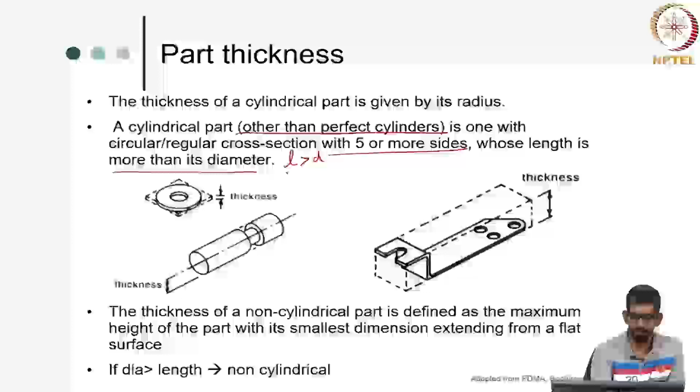Whose length is more than its diameter - that is how you define a cylindrical part. So, if it has 5 or more sides and its length is more than its diameter, then I would still call it cylindrical. It is not a perfect cylinder, but I would still call it cylindrical provided it satisfies these two conditions.

How they talk about the cylinder is, we will discuss what I have here, but just look at this. Let us say you are going to gift this to someone - what will you do? You will put a box around it. That is all this one says.

You take a part and imagine you are gift wrapping it, but a very snug gift wrap - taking a box that just encloses it right around. Then you go and measure the thickness of that box. That is what is the thickness of your part.

If you take this particular part, you do not know whether to take this as a thickness, or whether you will take this as a thickness. These are thickness of the sheet metal, but you are talking about thickness of the part itself.

Then what I need to do is put this box - you see this dotted line, imagine that is a box, a gift wrap that goes around it. Then the thickness, of course you know what it is - smallest dimension compared to the length - that is called the thickness.

Similarly, you can take this washer for instance. Imagine you are gift wrapping this guy, a small box, like Flipkart or Amazon packaging, whatever the box is, and you measure the thickness of that guy.

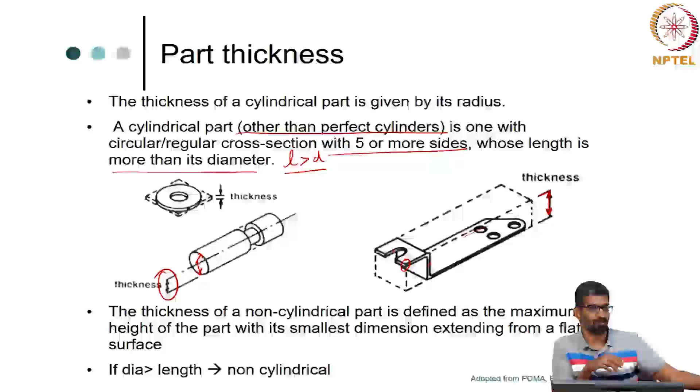See, the only point is whether it is this cylinder or it is a cylinder that goes into your drainage tubes. They are also hollow stuff only, but they are also cylinders. But if you measure the thickness, you necessarily know that one is much larger in thickness than the other. This can be handled by 2 fingers, whereas you need at least 2 people to handle that. It is as simple as that, that is all, okay.

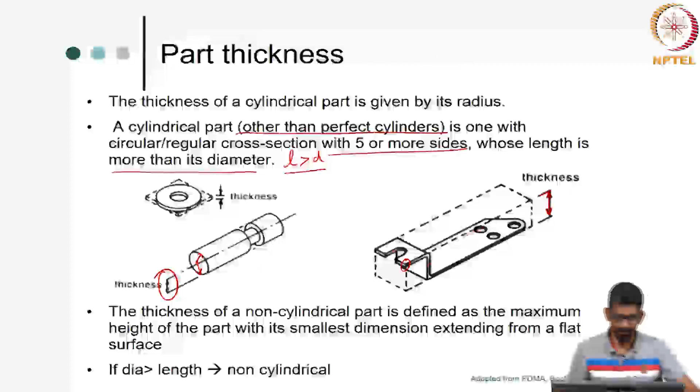So for instance, this is hollow in one sense. The washer is hollow if you look at it, if I extend this, then it becomes a hollow cylinder, but you look only at the outside.

Any questions? The other thing we talked about yesterday in one sense is diameter being greater than length. The L by D ratio always comes into picture. In case your diameter is greater than length, then it is a non-cylindrical part. In this case, that is the case. This is your diameter, and this is your length. So your diameter is larger than your length, hence it is a non-cylindrical part.

Therefore I will put a box around it and find the thickness. If you qualify this as a cylindrical part, then the thickness will just be the red line that I drew, which is your radius, but please understand, that is not the case, because there is also the diameter being greater than length issue. Any questions before we move ahead?

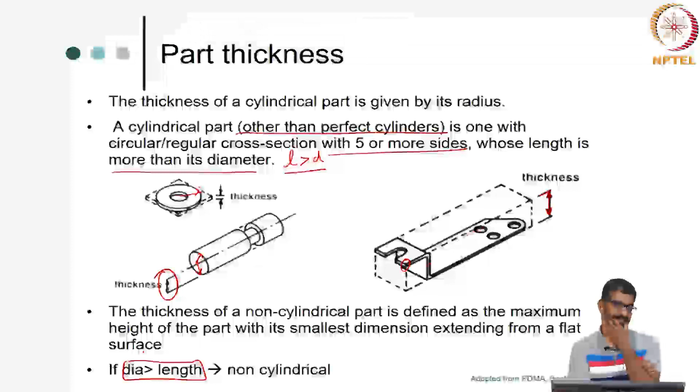What if diameter is similar to length? Let me think a little before answering. If your diameter is equal to length, I guess they might work out to be the same. If you imagine this to be of the same stuff, it will be the same, you can either take the length or the diameter, they will be the same value, so it does not matter.

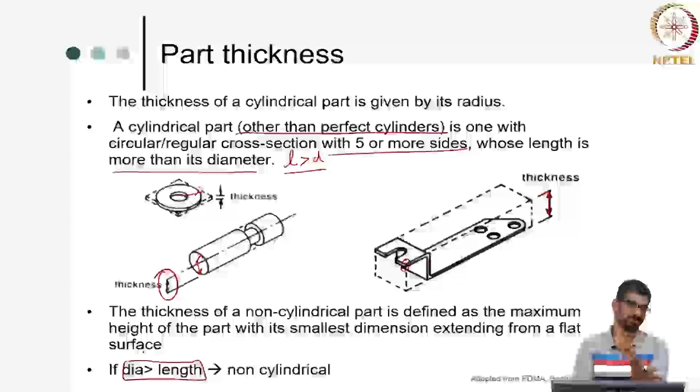If it is thin, it is less than 2 mm - you can imagine what 2 mm is, probably this much. If it is less than that, it is actually a headache, I have to carefully handle it. I might require 2 fingers, or I might need forceps to handle it. That too, if it is long, it might buckle, you need to handle it carefully, so there is a problem with that.

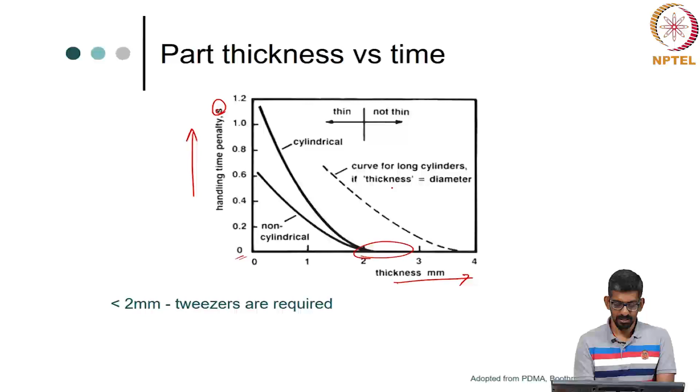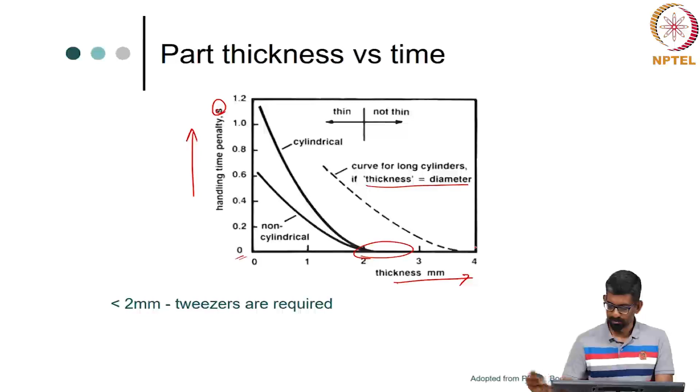So these are cylindrical parts and these are non-cylindrical parts that you are talking about. And the other one is, these are the curves for long cylinders if thickness is equal to the diameter. That is the one that we spoke about. It is going to take some time, some penalty is there if the thickness is equal to the diameter case.

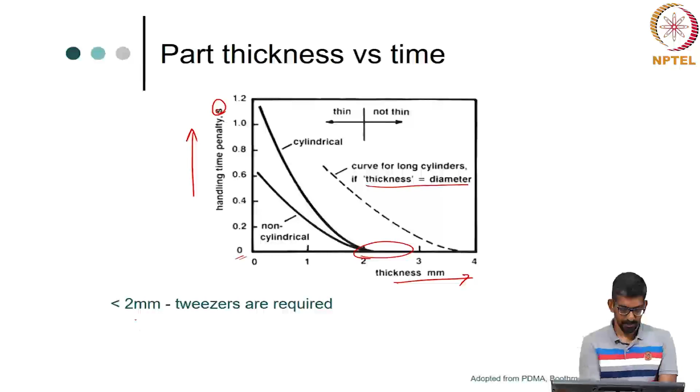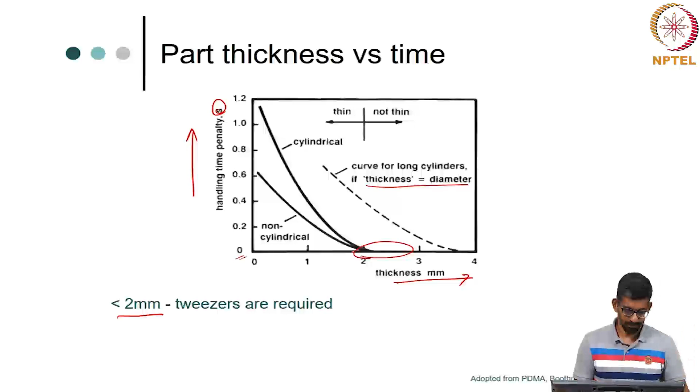If it is less than 2 mm, you usually require a tweezer or forceps to handle it. That is where the penalty comes into picture, because now I have to handle that tool, there is some time for it, then I will have to handle this guy and then put it back. So look at the intricacy, the level of intricacy that they have gone into. But because this was a detailed study, their entire career was based on this, and today they have this DFMA toolbox, which has a commercial version available, that many design companies rent it or lease it or buy it to use it.

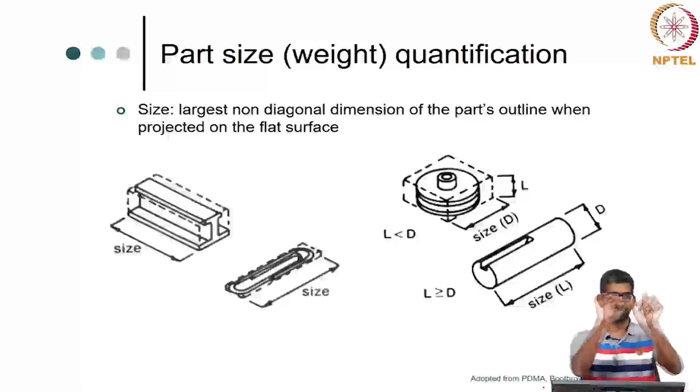The next one is part size. So we have spoken about symmetry, we have spoken about thickness, and the next one necessarily is, because he also asked this question of hollowness. Just because your thickness is more, does it mean that I need 3 people to carry this? No, not necessarily. It was a very thin sheet of element, just like a sheet of aluminum sheet that I folded into like this. So I might still be able to carry it as a single person, it is not concrete stuff.

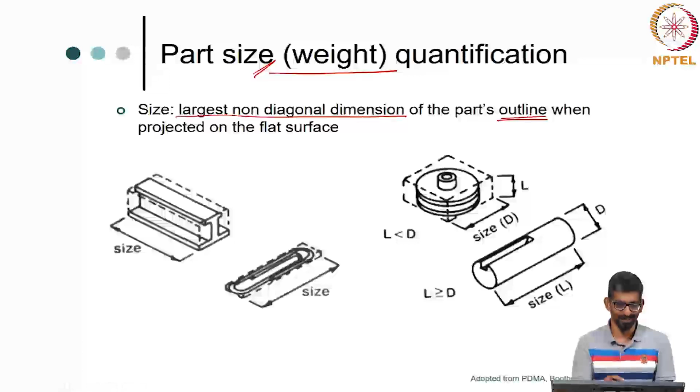So I need to be able to bring out my weight, that is called size. So please look at the terminology that they are using. Thickness is not size, size is different. It is very similar though. What size says is the largest non-diagonal dimension of the part's outline, not the inside surface, the outline, when projected on the flat surface. This is the second one that I told you for thickness.

You remember I said that you take a light and project on it, right? That's usually used for size. So you keep the component, and then you project light over it, and you just need to look for the largest non-diagonal dimension, not other than the diagonal, you need to look for the non-diagonal. So what would be the size for this guy? It will be the length.

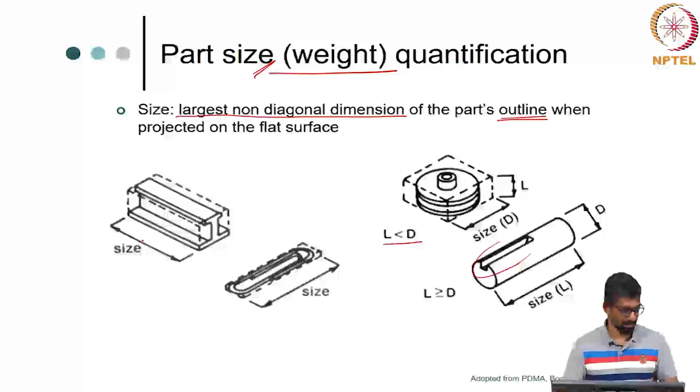So you can see pens that have non-cylindrical, non-circular cross sections, actually have a better grip.

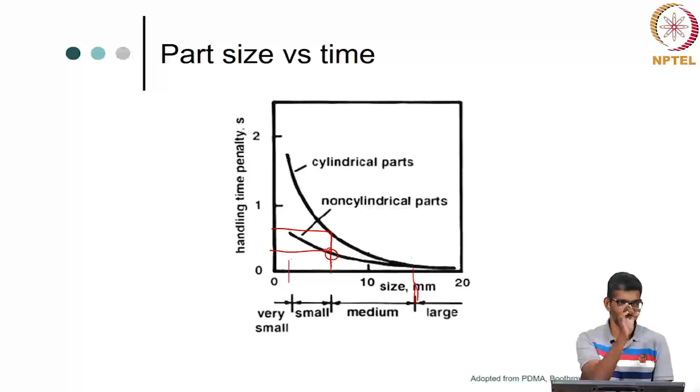Even cylindrical pens often have very minute linings around them. Old pens, or even new ones like Cello pens, have a grip near where you hold it, because if it is a pure cylinder, you will not get a grip on that. Any ballpoint pen you see will have linings to provide grip. Some people are now coming up with triangular cross sections that give a better grip, but to hold it in three fingers, you still need something close to a cylinder, because from a holding perspective, cylinder is still the classical design. From a grip perspective, you need to introduce grips on the cylinder or modify it a little so it gives grip while still being easy to hold. So there is a very nice design paradigm there.

These are just some introduction. I have just uncovered a little bit of discussion. It is up to you to go back to the text and see. The classical book we discussed is Boothroyd's PDMA, Product Design for Manufacturing and Assembly. All these pictures are taken out of that book, so that is the textbook you need to refer to.

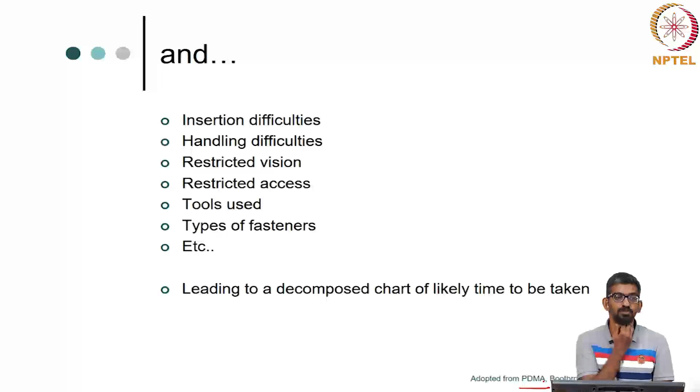And there are questions on insertion difficulties. What do you think could be a difficulty in insertion?

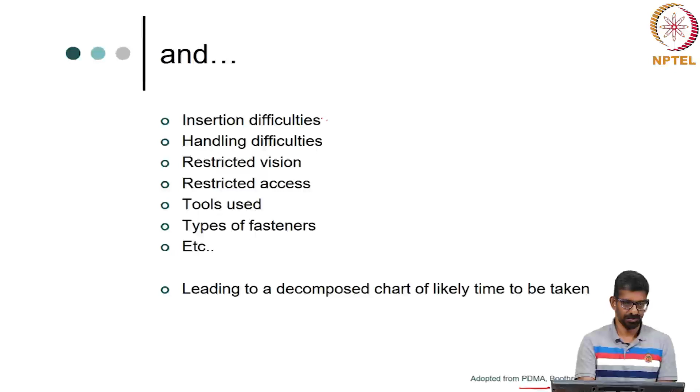Coefficient of friction is one thing, that's all correct. What I am trying to tell is, again, you need to have this stuff. There is a time penalty on this side, and this is the difficulty. So what, in that sense, could be the insertion difficulties that you can think of?

It is basically the resistance that is offered. We discussed yesterday, if there is air trapped in, you need the air to be let out. So you need a passage for that, or you have holes in the screws that let you do that. These are insertion difficulties, sometimes handling difficulties.

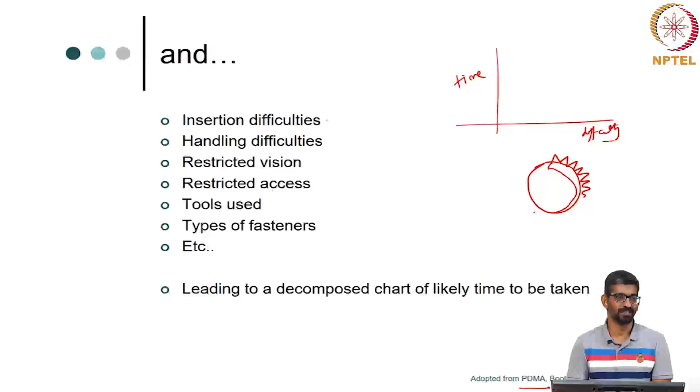You have a component like this. Your size, the thickness was like this. Size, thickness, everything is beautiful, but you have difficulty handling this one because of these sharp edges. So that also needs to be quantified.

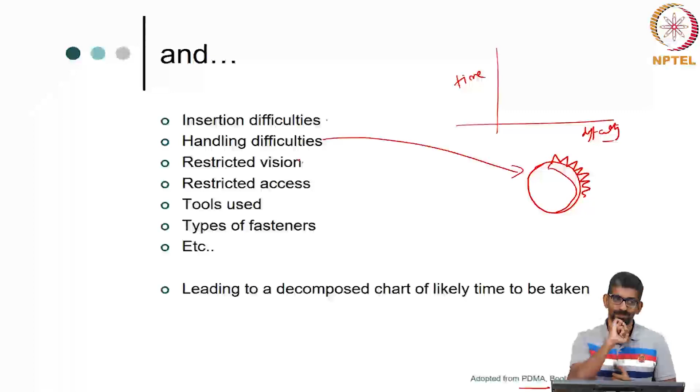Restricted vision: certain things cannot be removed or adjusted without specific projection of light on them, because of restricted vision. Imagine going to a doctor and telling them you have pain here. Have you seen them take a torchlight and put it there to see what happens? Either they should be able to see it with the naked eye or they need an X-ray; a torchlight alone won't work. But if you tell them you have pain here or there, immediately they take a torch first and then look, because they cannot just see it directly, they really need a torchlight to look into it. So that is restricted vision. Even in surgical setups, sometimes you need to cut open some part to look at a particular organ, because that is restricted vision.

That is the idea. Restricted access is also a problem. Any organ inside is restricted access, you cannot just see it like that, but there is a reason for it, and then you have other ways to look at it. You cannot keep everything for easy access, some things have to be kept inside.

Sometimes tools used matter, what are the different types of tools? I need to use a screwdriver, a wrench. You need special tools, special types of screwdrivers, and like I told you for the Mac desktop, you cannot just use a regular or special screwdriver, you need a vacuum puller to remove it. I need a special tool, and then the cost is more, the penalty is more on that. That is the catch.

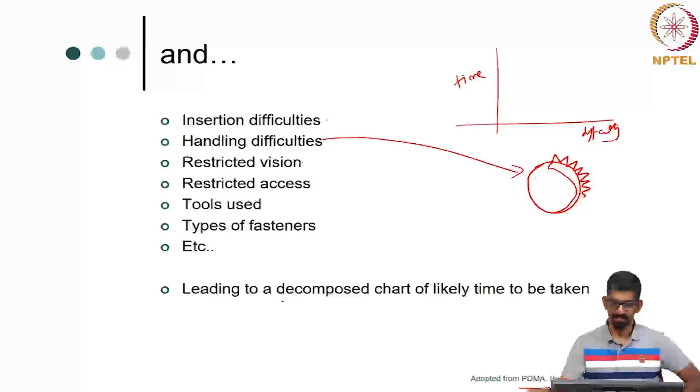Types of fasteners: for instance, you can have a nail, you can have a screw. In screws itself there are so many different types, and there is a time penalty for each one of them, and so on, it keeps going. So basically it leads to a decomposed chart of likely time to be taken. For each of these, research has been done and they have a graph like this, so for each one you know what it is. For anything you can imagine, they will show here is the value, and I have some numbers here.